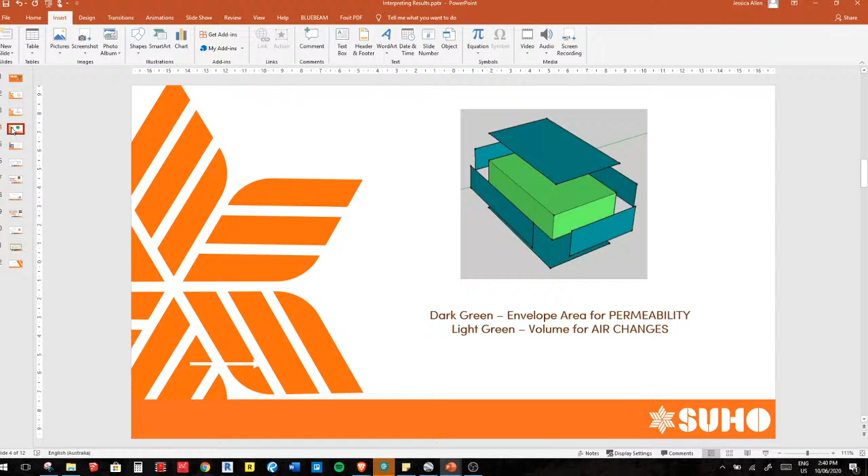So here is a beautiful little picture of a box. Let's just pretend that this is a house or an office building or any kind of building that you could air tightness test. So the dark green external section, this is what we refer to as the envelope area. The surface area in square meters of the walls, the floor, and the ceiling or the roof, the uppermost air barrier. And we use the dark area or the surface area to convert the airflow that's required to pressurize the building into a permeability score. So that is represented as cubic meters per hour per square meter.

The benefit of doing it this way is I can type while I'm talking. Cubic meters per hour per square meter.

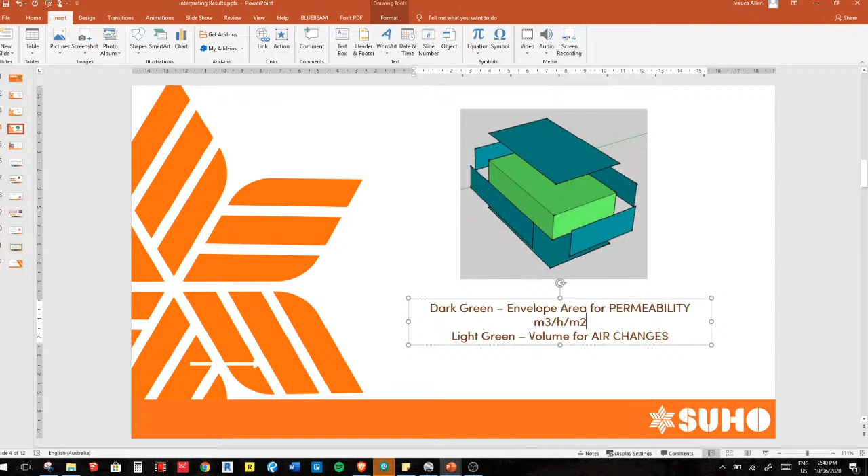The light green section is the volume of the building, and we use the volume of the building to convert the airflow that's required to pressurize the building into an air changes per hour score. Per hour, here we go. Very good, I can add to my presentation as I go. And that is the amount of time it takes for the entire volume of the building, the air in the volume of the building, to be completely replaced with outside air.

So the permeability score refers to how permeable the envelope is, how much air leaks out of every square meter of the building at 50 pascals. The volume is more a reference to how quickly the building inside is replaced. So they are both measuring air leakage, but they're measuring them in different ways.

And the reason that we make the distinction is that you will hear these two terms both used when talking about air tightness testing. Permeability is more often used in a commercial setting for larger office buildings, warehouses, hospitals. It's referred to in the Green Star guidelines. Permeability is used in the new building code. It's probably the more common way of talking about air tightness. It's much more comparable across different building sizes.

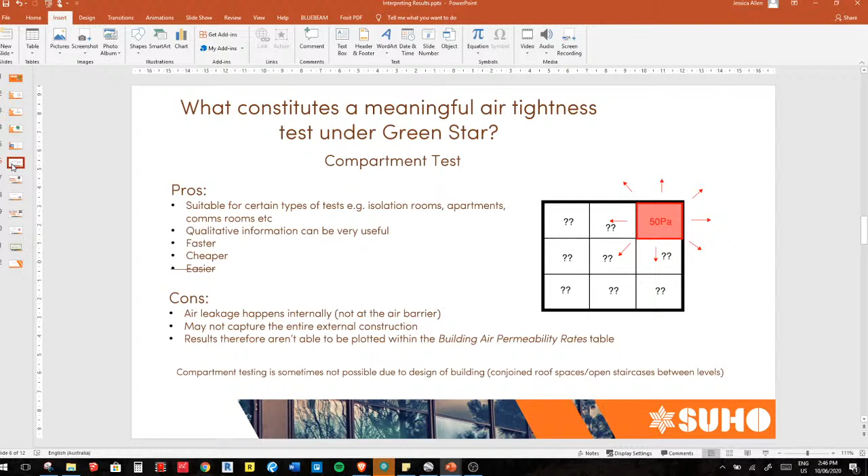So I'm just going to take out that section. So there are different ways to test a building and different ways to interpret the results. This is really important to understand, particularly in office buildings, because if you're getting an office building tested, it's actually not as useful to get a small part of it tested as it is to get the whole thing tested. Now that might stand to reason, but when a lot of clients come to me for their large building testing, they only really want me to test a small portion of the building, and that's generally Green Star clients, hence the Green Star reference in my slide here.

They just want a small test and they want to get the point associated with that test. That's generally why clients come to me for large building testing. The smaller compartment tests, though, have their place. They definitely have their place. You can find out a lot of really useful information about the construction of a building and the performance of the envelope by doing smaller compartment tests. But the results that you get are not usable in terms of comparing them against other international buildings, other results.

And the reason is that when you are dividing the airflow, so let's go back and we'll get to this stage. When you're calculating the external envelope area of a building, if you're only testing a small portion of that building, you only need to calculate the envelope area that's facing the outside air. So if you're testing, for example, a middle floor like this one, you would only calculate the envelope area of the external walls. You wouldn't include the floor or the roof of that level because you don't really care what moves in between levels or in between rooms. You only care what moves in and out of the building envelope.

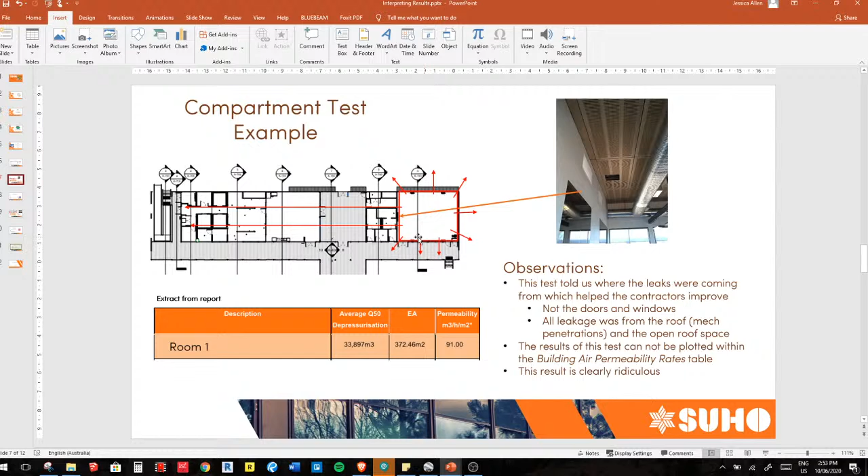I'll take out the reference to Green Star again.

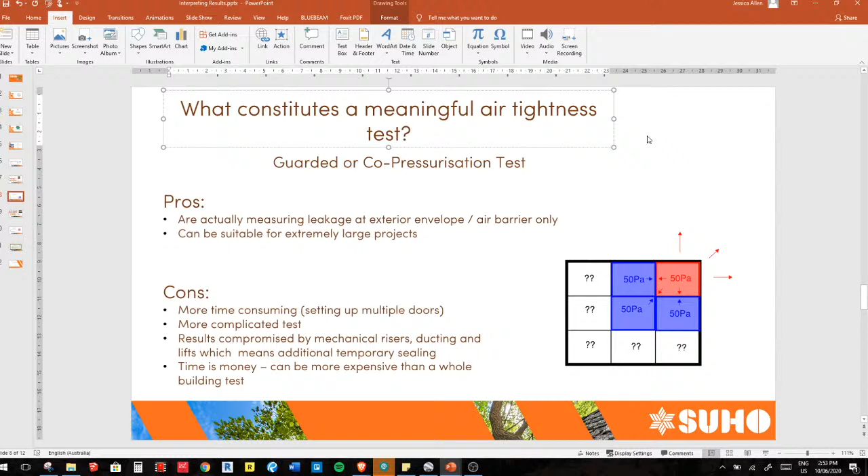So another way you can test small portions of a building is by doing a guarded test or a co-pressurization test. So very similar to the first kind of test I mentioned, except instead of allowing air to escape through internal floors and walls, you're co-pressurizing those neighboring zones. So you've got a test zone and you've got the neighboring zones or the guard zones, and you've got equipment in the red section here to test this section, and you've also got equipment in here co-pressurizing, which means that the airflow through the internal surfaces is being neutralized, and you're only going to be quantifying the air that's leaking out of the external surfaces, the envelope area that you're trying to actually test and measure.

So if you would like to only test a small portion of a building, and you want the numbers to mean something, this is how you do it. You have to neutralize the internal leakage.

The problems with this kind of test, the compartment test and the co-pressurization test, are that particularly in large complex office buildings, you've got a lot of ducting and vents and lift shafts and mechanical risers and all sorts of complicating factors that are going to carry air from room to room and level to level, and you don't necessarily want that. In fact, you probably don't want that if you're testing a small portion of a building.

So there's a lot of time that is spent preparing a section of a building for testing. Time is money, so it can get expensive. With this kind of testing as well, you also need a lot more equipment because you have to have guard zones as well as a test zone.

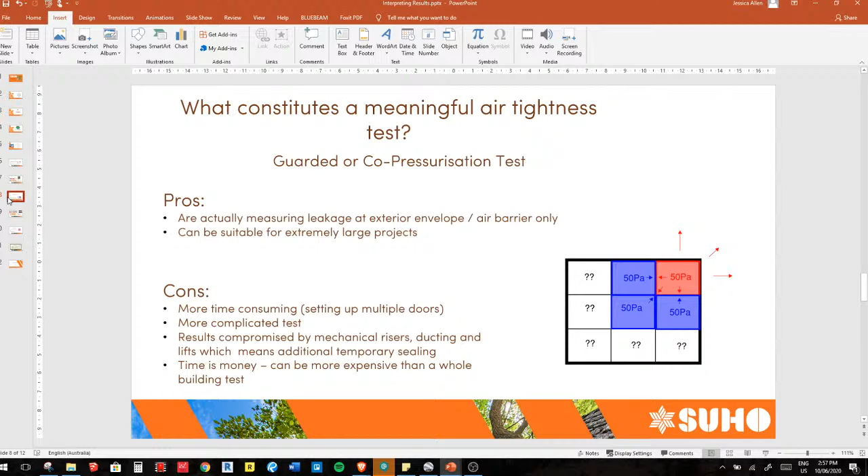usually. And a lot of air tightness testers will try to push this and say it's just as good as any other kind of test, but it's not. If you're out to get an air tightness test, just be mindful of that when you're engaging your contractor. Just look at the strategy that they're using and how it fits in with your project requirements.

This is an example of a co-pressurization test that we did. This building was permanently compartmentalized down the middle, and so we tested each side individually. I haven't color coded this, but we just swapped. One side was the test zone, one side was the guard zone, and then vice versa. One of these was clearly a lot leakier than the other one, but this test told us where the leaks were coming from.

And the doors and windows in this project, we did a number of buildings on this site, and across the board, the doors and windows were excellent. The installation was good. The quality of the product itself was good. But we discovered where leaks were coming from, and it was all through the walls, the building wrap.

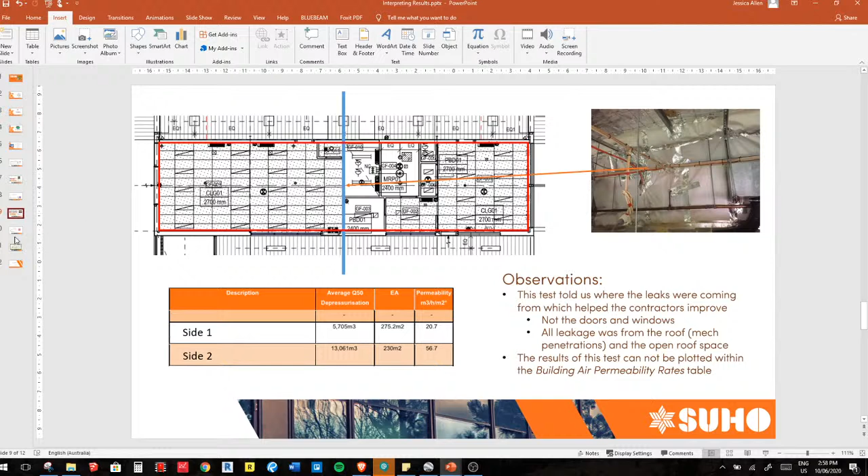So as I said earlier, the results of a test like this can be plotted on a graph. You can decide whether this is normal practice or best practice. Now, neither of these are anywhere near best practice, but the idea of a guarded test is that you can use the numbers. The best way to test any building, whether it's a small house or a very large office building, is to do the whole thing all at once. All buildings are systems, and they should be tested as a system.

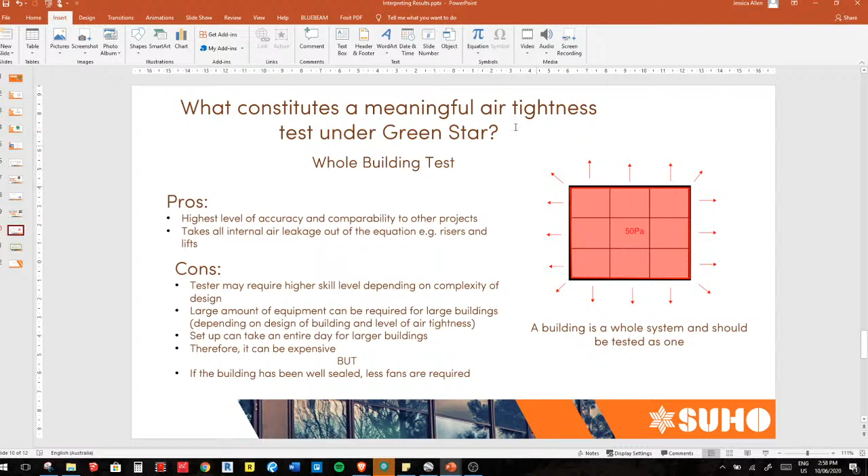Again, I did this presentation for a Green Star audience, as you can tell, but this information applies to the whole industry. Anyone who's getting an air tightness test done, this information applies to you. The main audience in Australia is the Green Star audience because it's under their design and as-built guidelines. They can get points for it, but it applies to anyone.

So yes, as I was saying, a whole building test is the best way to get an air tightness test done. It has the highest level of accuracy compared to other approaches. All of the internal leakage is taken out of the equation, with the exception of, you still have issues like lift shafts, which go down to basements.

Because obviously between the conditioned level and the basement level, there's going to be a lift that goes through both of those levels, and that's usually a point of weakness that I have found: air leaks between basement levels and conditioned levels at the lift shaft. Just as a little hot tip. But because this kind of testing is measuring as much of the external envelope as is possible, it means that the number that you get is usable.

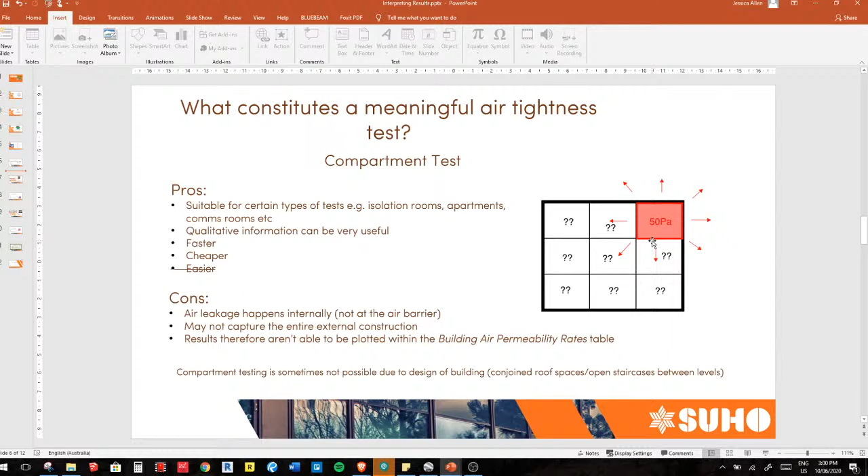So yeah, so now we've covered envelope area versus volume, we've covered permeability versus air changes, and we've covered the three main types of testing. There is one other type of testing, which is testing only a facade, which is like an even smaller version of this kind of test, but I won't cover that one today because I have never had to do it, and that's more of a test of an individual product than of building performance in my experience.

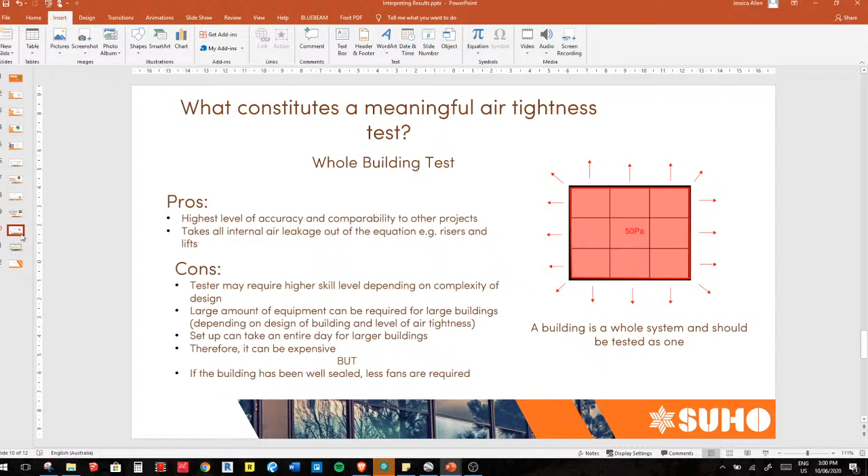So I hope that was useful. Just a nice quick summary for you on how the results of an air tightness test are converted into something usable, and if you can't convert your results into something usable, what the benefits then might be.